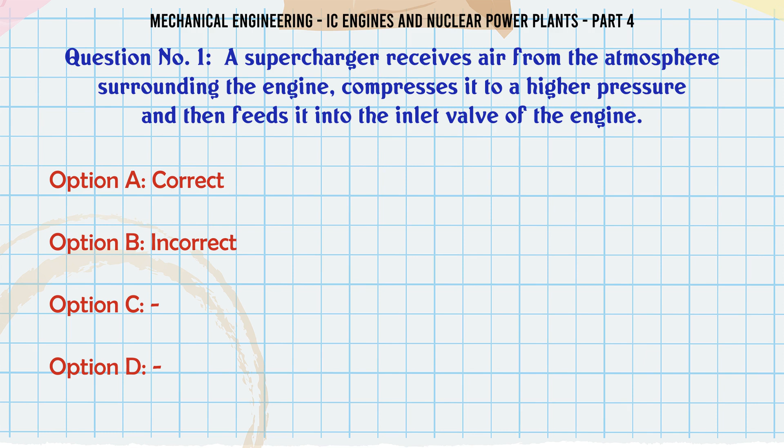A supercharger receives air from the atmosphere surrounding the engine, compresses it to a higher pressure, and then feeds it into the inlet valve of the engine. A. Correct. B. Incorrect. The correct answer is correct.

Isooctane C8H18 has octane number of A. 0, B. 50, C. 100, D. 120. The correct answer is 100.

The brake power is always greater than indicated power. A. Agree. B. Disagree. The correct answer is disagree.

An ignition coil in the spark ignition engines supplies voltage to the spark plug. A. High. B. Low. The correct answer is high.

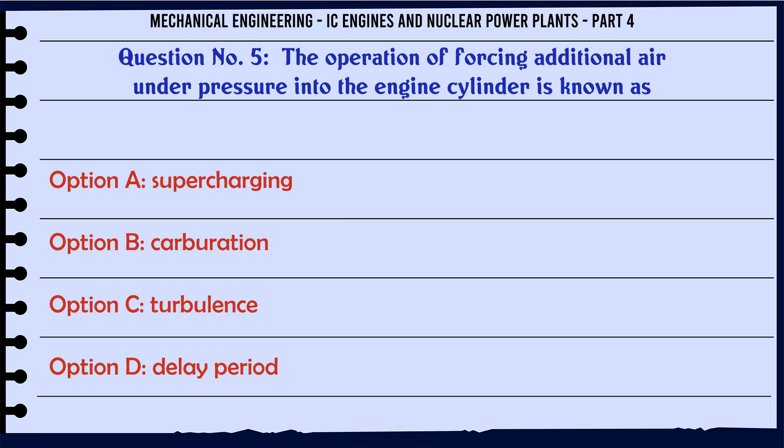The operation of forcing additional air under pressure into the engine cylinder is known as A. Supercharging, B. Carburation, C. Turbulence, D. Delay period. The correct answer is supercharging.

The cylinder of a gas engine is made larger than that of the petrol engine. A. Smaller, B. Larger. The correct answer is larger.

The thermal efficiency of a petrol engine is less as compared to diesel engine. A. Same, B. Less, C. More. The correct answer is less.

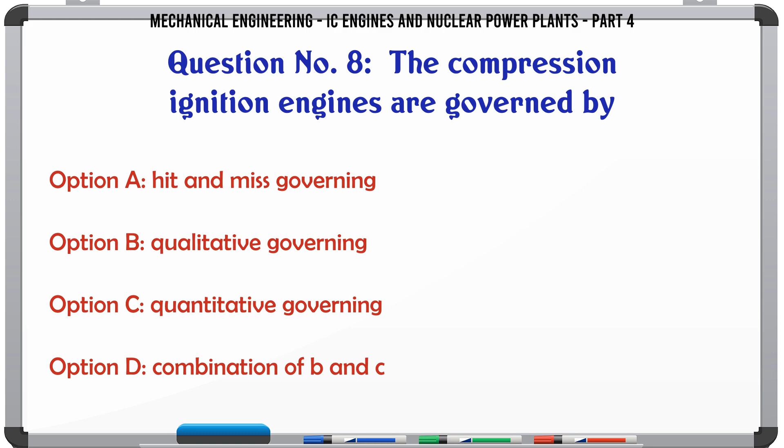The compression ignition engines are governed by A. Hit and miss governing, B. Qualitative governing, C. Quantitative governing, D. Combination of B and C. The correct answer is qualitative governing.

The delay period in oil engines increases with increase in the speed of engine. A. Agree, B. Disagree. The correct answer is disagree.

The specific fuel consumption per BP hour for a diesel engine is about A. 0.2 kilograms, B. 0.25 kilograms, C. 0.3 kilograms, D. 0.35 kilograms. The correct answer is 0.2 kilograms.

The ignition quality of diesel oil is expressed by A. Cetane number, B. Octane number, C. Calorific value, D. None of these. The correct answer is cetane number.

In a 4-stroke cycle petrol engine, the expansion A. starts at top dead center and ends at bottom dead center. B. starts at 30 before top dead center and ends at 50 before bottom dead center. C. starts at 30 after top dead center and ends at 50 after bottom dead center. D. may start and end anywhere. The correct answer is starts at 30 before top dead center and ends at 50 before bottom dead center.

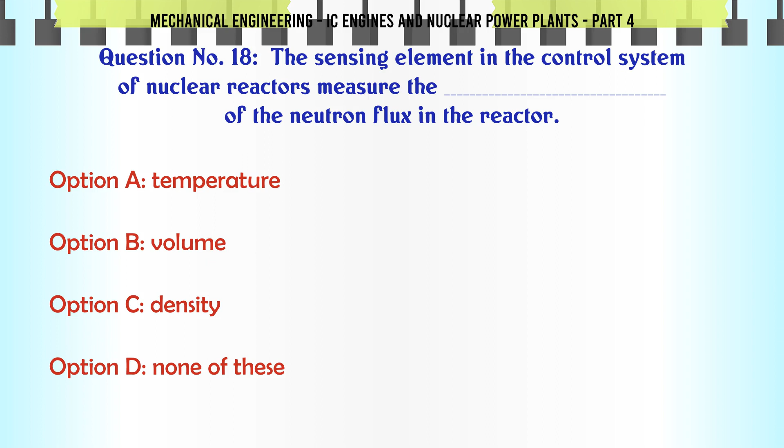The sensing element in the control system of nuclear reactors measures the neutron flux in the reactor. A. Temperature. B. Volume. C. Density. D. None of these. The correct answer is density.

If the temperature of intake air in internal combustion engine increases, then its efficiency will A. Remain same. B. Decrease. C. Increase. The correct answer is decrease.

In a coil ignition system of petrol engines, a condenser is connected across the contact breaker in order to A. Prevent sparking across the gap between the points. B. Cause more rapid break of the primary current, giving a higher voltage in the secondary circuit. C. Both A and B. D. None of the above. The correct answer is both A and B.

Which of the following statement is correct regarding normal cetane? A. It is a standard fuel used for knock rating of diesel engines. B. Its chemical name is normal hexadecane. C. It has long carbon chain structure. D. All of the above. The correct answer is all of the above.

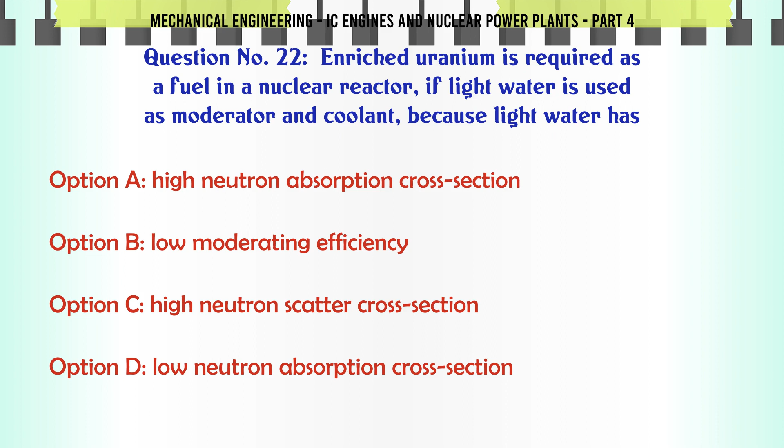Enriched uranium is required as a fuel in a nuclear reactor if light water is used as moderator and coolant, because light water has A. High neutron absorption cross-section. B. Low moderating efficiency. C. High neutron scatter cross-section. D. Low neutron absorption cross-section. The correct answer is high neutron absorption cross-section.

As compared to air standard cycle, in actual working the effect of variation in specific heats is to A. Increase maximum pressure and maximum temperature. B. Reduce maximum pressure and maximum temperature. C. Increase maximum pressure and decrease maximum temperature. D. Decrease maximum pressure and increase maximum temperature. The correct answer is reduce maximum pressure and maximum temperature.

The engines can work on very lean mixture of fuel. A. Spark ignition. B. Compression ignition. The correct answer is compression ignition.

The ignition quality of petrol is expressed by A. Cetane number. B. Octane number. C. Calorific value. D. All of these. The correct answer is octane number. The fuel valve in a 4-stroke cycle diesel engine A.

The fuel valve: A. Opens at 15 after top dead center and closes at 20 before bottom dead center. B. Opens at 15 before top dead center and closes at 20 after top dead center. C. Opens at top dead center and closes at bottom dead center. D. May open and close anywhere. The correct answer is B: opens at 15 before top dead center and closes at 20 after top dead center.

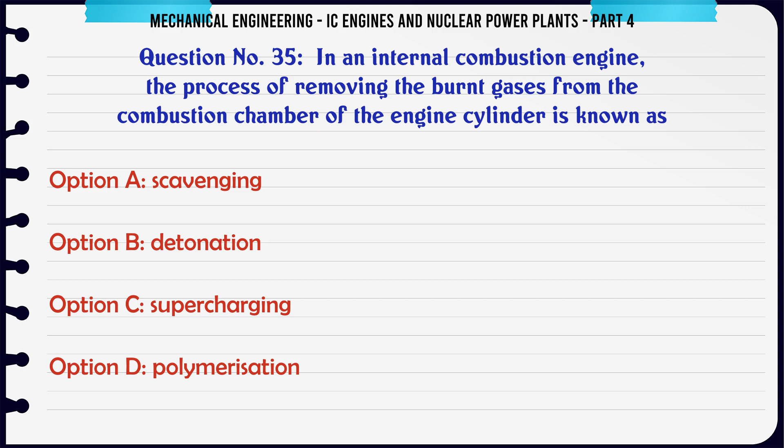In an internal combustion engine, the process of removing the burnt gases from the combustion chamber of the engine cylinder is known as: A. Scavenging. B. Detonation. C. Supercharging. D. Polymerization. The correct answer is scavenging.

In petrol engines using a fixed octane rating fuel, the increase in compression ratio will not affect the knocking tendency. A. Agree. B. Disagree. The correct answer is disagree.

Supercharging is the process of supplying the intake air to the engine cylinder at a density the density of the surrounding atmosphere. A. Equal to. B. Less than. C. Greater than. The correct answer is greater than.

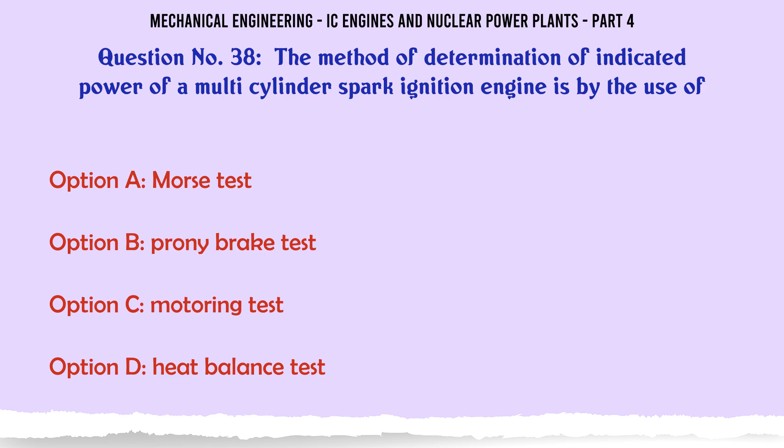The method of determination of indicated power of a multi-cylinder spark ignition engine is by the use of: A. Morse test. B. Prony brake test. C. Motoring test. D. Heat balance test. The correct answer is Morse test.

In a 4-stroke cycle petrol engine, the compression: A. Starts at 40 after bottom dead center and ends at 30 before top dead center. B. Starts at 40 before bottom dead center and ends at 30 after bottom dead center. C. Starts at bottom dead center and ends at top dead center. D. May start and end anywhere. The correct answer is A: starts at 40 after bottom dead center and ends at 30 before top dead center.

Reflector in nuclear power plants is used to reflect neutrons back into the active core. A. True. B. False. The correct answer is true.

During idling, a petrol engine requires mixture: A. Lean. B. Rich. C. Chemically correct. The correct answer is rich.

In natural uranium, the constituents of the 3 naturally occurring isotopes are: A. U-234 0.006, U-235 0.712, and U-238 99.282. B. U-234 0.712, U-235 0.006, and U-238 99.282. C. U-234 99.282, U-235 0.006, and U-238 0.712. D. U-234 0.006, U-235 99.282, and U-238 0.712. The correct answer is U-234 0.006, U-235 0.712, and U-238 99.282.